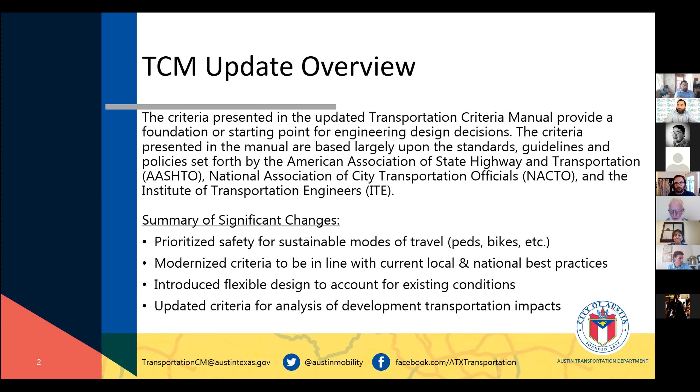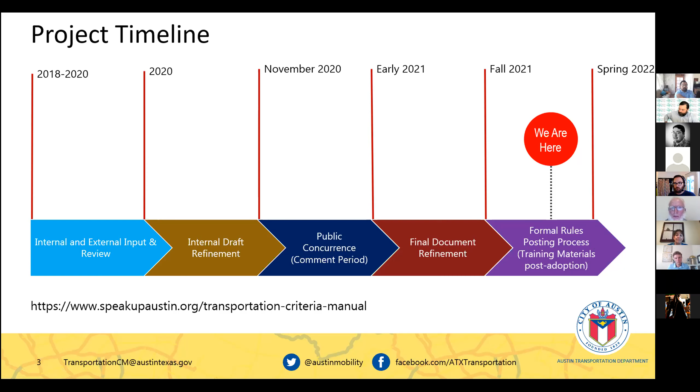So where we're at right now, like Jay said, we're open for our final round of public comments currently. We've been through a couple years of revisions, because this wasn't just a typical minor revision to a criteria manual. This was throw the whole thing out, start over again, work with all the departments on what will go in that document. So now we're in the final process of rules posting, which is public comment until the 1st of November, and then it will be going for adoption.

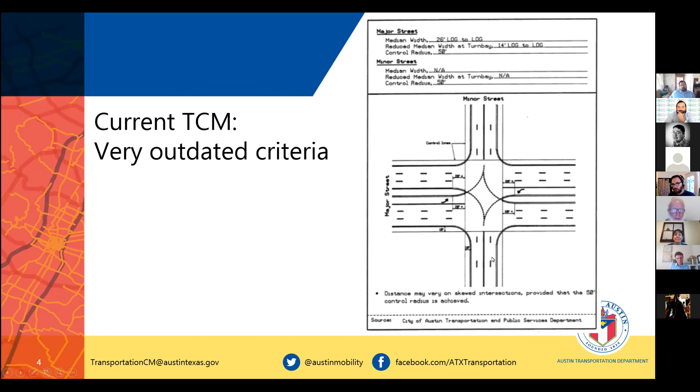The current criteria manual is very outdated. This is a figure that is still current in the manual, showing kind of what we don't want - just big multi-lane arterials. Typically we probably would not ever do a 4-lane undivided as a new street right now, yet this is what our manual still shows. It doesn't really get into much detail about pedestrian or bike crossings or facilities. So very outdated, to the point that we basically don't use it currently, because it's just so very out of date.

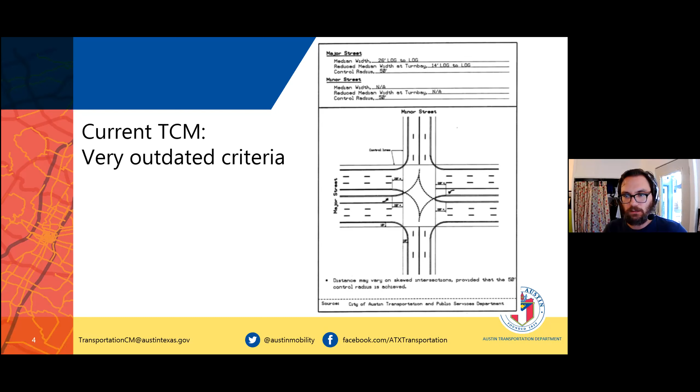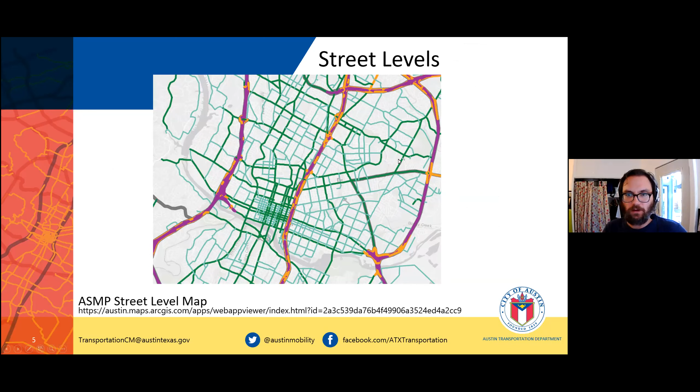Some background that might be helpful is that in our Austin Strategic Mobility Plan, we have what are known as street levels, where anything that's not really highlighted, just like a little neighborhood street, that's a level 1 street. Collectors are 2s. And then if you're familiar with Austin, things like Pleasant Valley Road or Airport would be a 3. And something bigger like a major arterial or highway is like 4 or 5. So that's just for context as I am showing some of these figures.

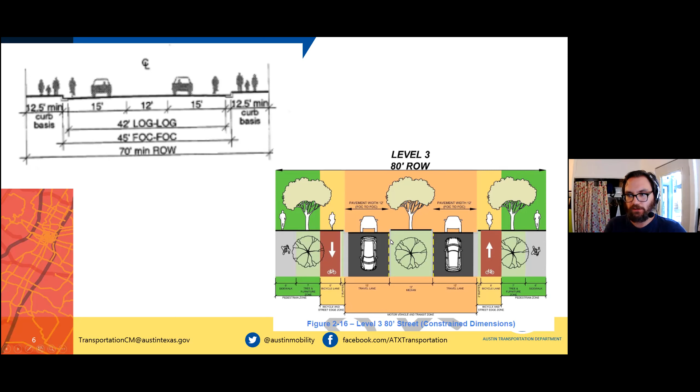Again, very outdated previous TCM, where these are kind of similar levels of street and similar amounts of right of way. Previously, just a wide outside lane without designated bike lanes of any kind is what is shown in the currently adopted figures. Now we're showing what we now know to be a much better, safer solution in our cross sections, with raised protected bike lanes, generally median divided for more major roadways - kind of just a better multimodal experience.

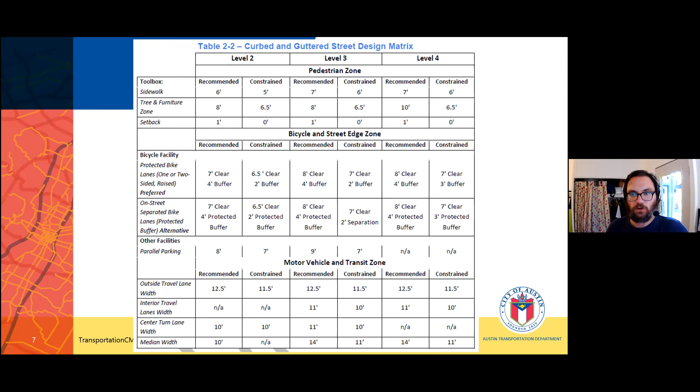This is a lot of information, but this is probably the table that a designer of a street in Austin would be going to the most, which is really setting the minimum and recommended dimensions of things like these raised bicycle lanes, the offset from the street, how wide the travel lanes need to be, the tree zones. This has all been updated and really modernized to prioritize multimodal safety.

Only in rare cases does the NACTO contextual guidance say that the right solution for the street is a shared street or bicycle boulevard, meaning cyclists, even young cyclists who might be heading to school, would just share the road. They have very strict guidelines on that - less than 20 miles an hour, maximum volume thresholds for vehicles. And that is kind of hard to overstate what a sea change that is in terms of thinking of designing our public streets.

For any of y'all from Austin who might know how our old speed management applications worked, really when we thought about speed management previously, or even up to today, we were thinking about the posted speed of a neighborhood street is going to be about 30, maybe it was designed for 35. So let's collect the speed data, and the 85th percentile shows people are going 35. So maybe let's put a few speed humps in to slow them to a bit closer to the speed limit. But what we know from using this guidance is that it's not slow enough - we need to be aiming lower to make these level 1 streets actually safe for the neighborhoods.

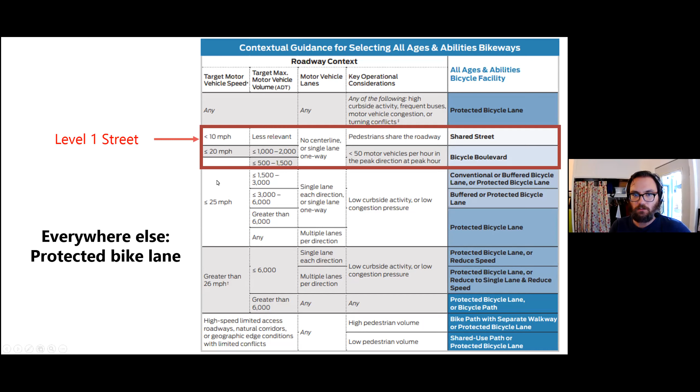Really what this contextual guidance says is that everything else, anything of a higher volume or speed threshold, the right answer for that street is a protected bike lane. So that's kind of where that was our starting point for the TCM.

The criteria now also looks at target speeds versus a more typical design speed, rather than going a bit above the speed limit. This is more like designing for where you want the speeds to be. So for these level 1 streets, a lot of that is going to be in the 20 mile an hour desired threshold.

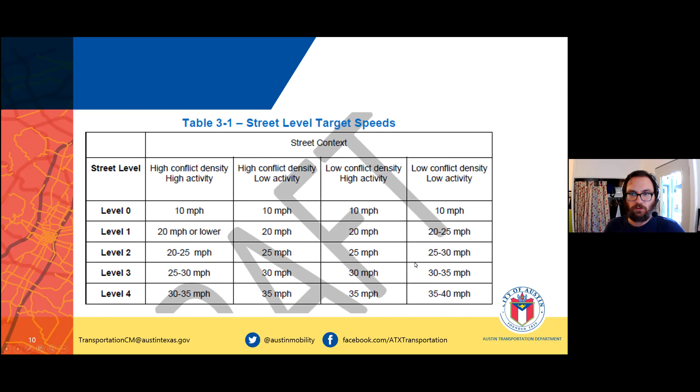Even at something like an airport boulevard, the thought would be that it would be designed to be a bit slower than currently. That leads to the natural question of how do you design to get those desired speeds? This is a typical cross section for a level 1 street in our TCM update - a rather narrow street with parking both sides to create that friction.

And now written into the criteria is that for new streets, there is a maximum spacing between a speed management treatment. That could still be speed humps, but typically that might also be things like pinch points or bulb outs or crossing islands that do more horizontal deflection to slow speeds.

The idea here really is that rather than the previous way we did things, where a developer might build a whole network of streets for a development and they wouldn't put any speed management into it - just long straight streets - and we know that will lead to speeding. We have the data that when those streets get built, there is a speeding problem right out of the gate.

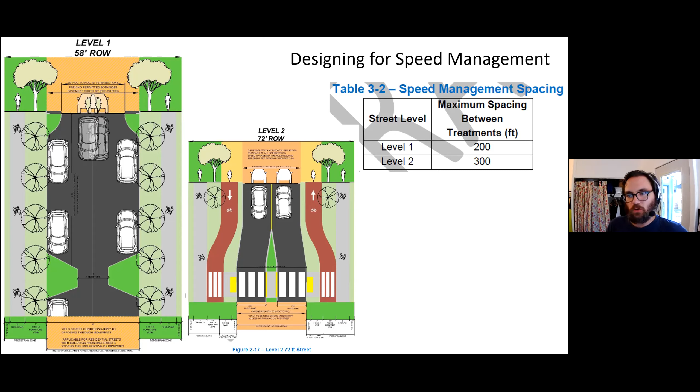So rather than putting those new streets into our future work that we're going to need to handle with speed management down the road, this makes it much more proactive, and we're building in that speed management right from the start.

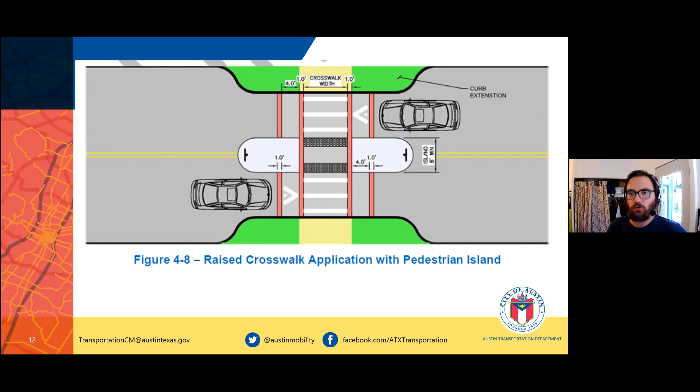So all of these things like bulb outs, crossing islands, raised crossings, we have been using them kind of as one-off designs for these speed management projects, but now it's really built into our criteria manual as a tool that we can use by default without lengthy approval and review from other departments.

Same with our neighborhood bikeway treatments that we might be using for specific bike routes that we're retrofitting through town. We now have some tools such as restricting vehicle crossings to have lower volume neighborhood bikeways. That is now a tool in the toolbox that we did not previously have.

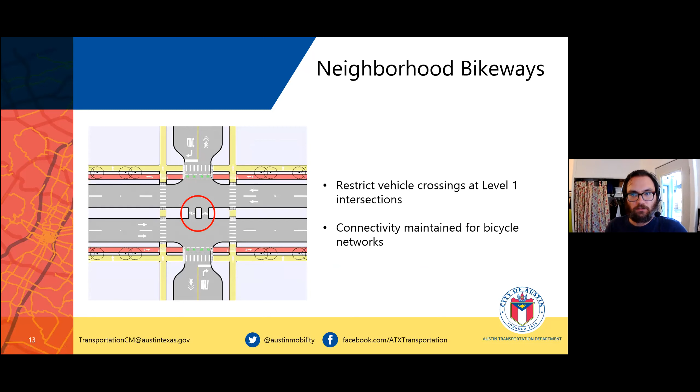Specifically to bulb outs, I know this is an important thing for some. The TCM is now very specific about it - it just says very straight, bulb outs are to be used as a preferred treatment rather than the inclusion of a turn lane at intersections. Of course, there's always going to be more major intersections where maybe they're signalized, or for whatever reason, we know through analysis that a turn lane is needed there.

But this kind of goes a long way to say that, by default, the solution is that if there's parking on the street, you'll bulb out at the intersection where that parking was. So things like reducing crossing distance with either median refuge areas or these bulb out solutions is now much more baked into our criteria.

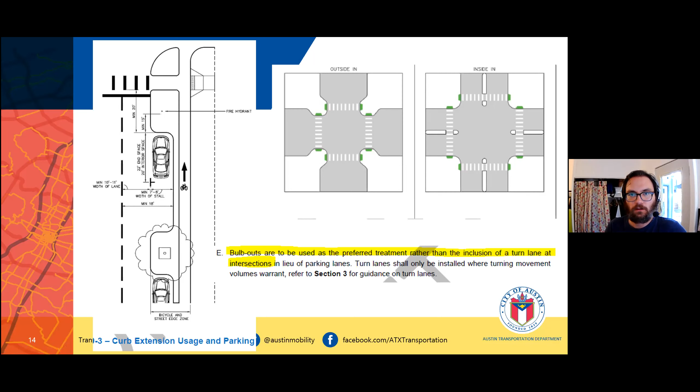And here's just an example. This is an intersection in the Mueller development here in Austin. It was essentially designed to the same criteria that we're talking about in the TCM update, but required rigorous going to different departments, getting design exceptions, going to the fire department, all kinds of groups, public works, to get permission to do this kind of more urban design to reduce crossing distances and reduce turning speed of vehicles.

Now this is what the standard for two neighborhood intersections and two neighborhood streets intersecting would be. It says specifically that it is a narrow width between the bulb outs and gives a much lower radius as standard for these intersections.

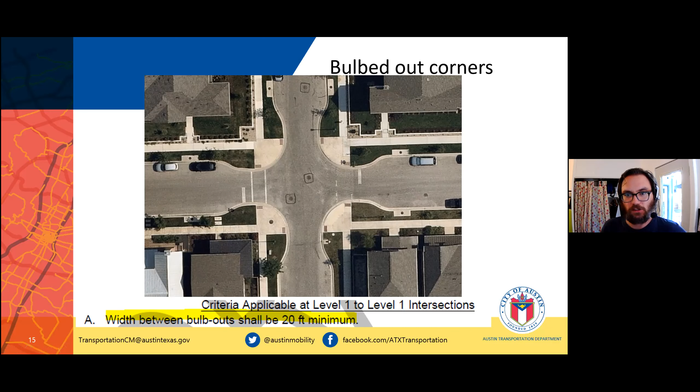And that was all describing what our approach was on level 1 neighborhood streets. So this is kind of everything else falls into - we need the dedicated space for protected bike lanes in this bicycle street edge zone, as it's called in the TCM.

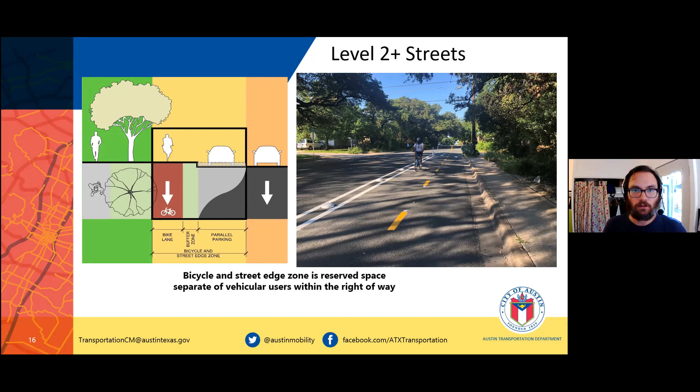And I'm sure most, if not all of you on the call are familiar with these approaches, but it's protected bikeway. Here it's shown as kind of an at-street, but in general, the TCM is proposing raised bikeways as the main solution for new or retrofit streets, separating cyclists from the street zone.

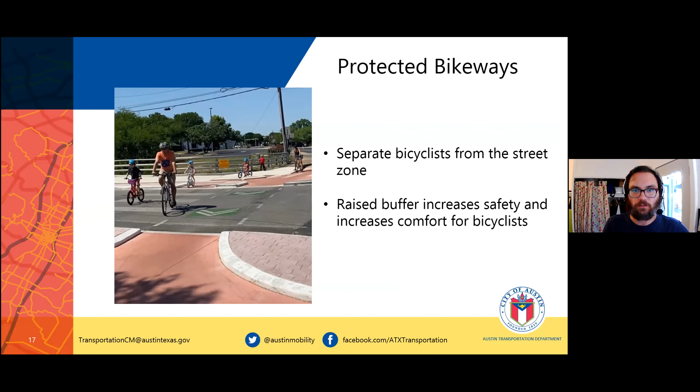And now there is also, for the first time, adopted guidance and figures for protected intersections, which is huge. This is really the preferred treatment for anywhere that we have separated bike lanes. As you approach an intersection, it gives the designer all the details they need to design it.

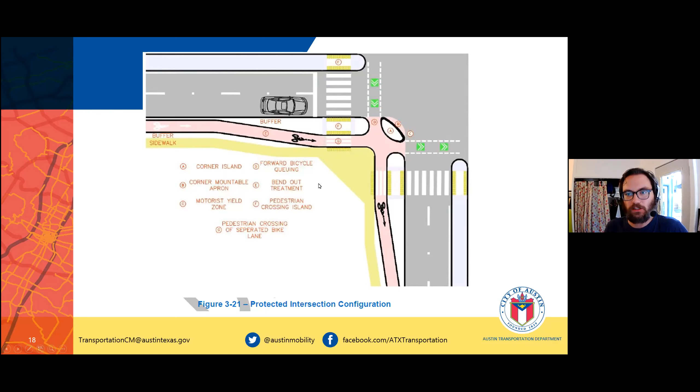Although we do have some upcoming standard details that would be an appendix to the TCM to give even actual dimensions and a lot more detail about constructability.

Not to say that protected intersections are something we haven't been doing. This, again, is in Mueller, what I understand, one of the earlier protected intersections in the country. But again, it took a lot of detailed conversations with different departments to make it happen.

Whereas now it's worded very deliberately: when non-vehicular modes of travel are separated prior to the intersection, protected intersections shall be the standard intersection design. So it doesn't leave a lot of wiggle room. Unless there's a reason we could give a waiver for, that would be the standard design for an intersection anywhere streets with bike lanes meet.

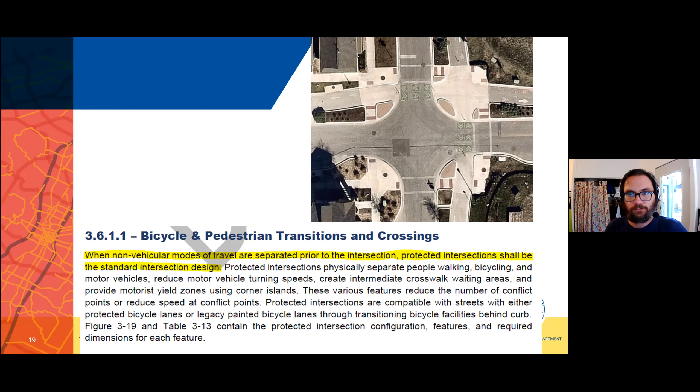Another big change for the TCM is that anywhere where, if you see cut off here, what would be the left to right street would be the major street in this example, and the up and down street would be the minor street, level 1. In those cases, the raised bikeway and the raised sidewalk would remain raised across the intersection.

This is something we've seen examples of in other cities, notably in Cambridge. They were one of, if not the leader of raised bike lanes in the country. We heard from their experience that they did not require these raised crossings when they first started installing raised bikeways, and it was fairly problematic in terms of feeling like you're riding and going up and down a roller coaster as you hit these minor streets and driveways, as well as right hook problems from vehicles turning in across the bike path quickly. Whereas this would slow anyone and act as a gateway that you're entering these lower speed streets.

We had a presentation on this last week, and there was a lot of questions about the treatment here. So as well as kind of visually indicating this is all a big concrete apron, you would continue the colored bike lane across the intersection, so visually you can see that there is potential conflict here and to be aware.

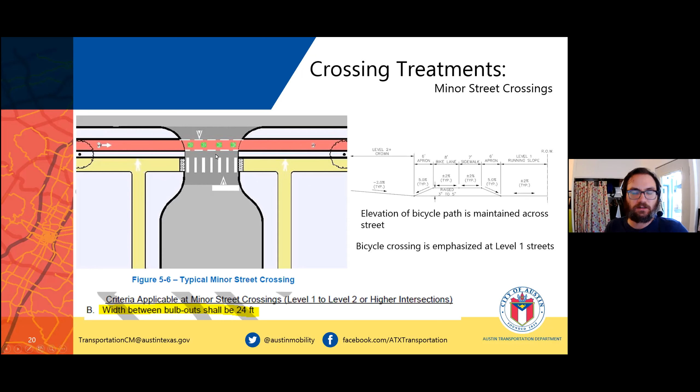Similar to this, we have been building integral color into our bikeways in recent years, as well as standardizing the conflict markings of bikeways for a good number of years. But it has not been an adopted criteria manual up until now. So this will make that all very consistently done, whether it's an internal project to our department or a developer building or a big corridor project. So whoever's building this will make it much more consistent.

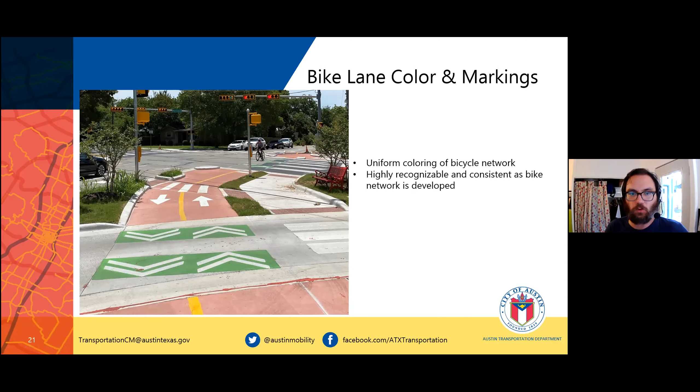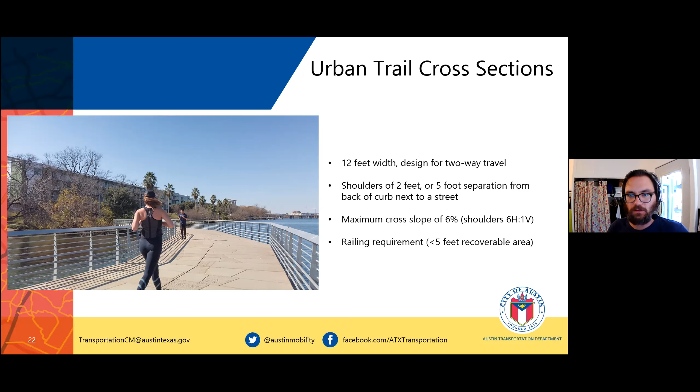Regarding urban trails, this is also kind of bringing their criteria up to the state of practice that they're already following, but just getting it all written into the manual in terms of what is their desired width versus a minimum 12-foot width of an urban trail. Things like slope grades, railing requirements, all of that stuff to properly design an urban trail, as well as design speeds that have never been really fully adopted until now.

Now that is in the urban trail section, as well as the bikeway section, to make sure that we're not creating quick bends in bikeways, things that are just not comfortable or safe to navigate, as well as things like vertical clearance criteria.

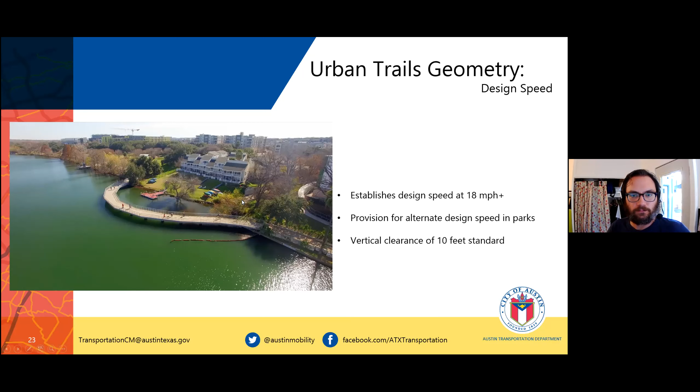So what has made these tighter, more human scale designs possible? We have been doing some of this stuff for a few years, but it has been a pretty cumbersome process to get each unique design through all of the review process, because it's really not in an adopted criteria manual.

And if you want us to go out with you in a fire truck to prove it even further and set up cones, we'll do that. And they took us up on that. So we went out for an afternoon of riding around in fire trucks, really proving to all of the various stakeholders that this would work.

So that really took rethinking of all different assumptions about roadway widths, about lane widths. These radii were a big deal to various stakeholders about intersection radii. For example, if you were to look in our old criteria manual or in TxDOT's roadway design manual, you're going to see radii that are 50 plus feet often for certain levels of street. And we're showing, from the lower level streets, maybe 15 up to 25, 30 at the very highest. So it is pretty radically different, which took a lot of talking people through and showing them that this could work.

Up to the point where we did need to amend fire code in the city to make this all mesh well together, so there was not a conflict between what is in our adopted criteria manual and the fire code, which resulted in this more human scale design.

And it really took rethinking our assumptions even more broadly about what is the best, highest use of the street, and what does it really take to make a neighborhood street comfortable for even a kid who might be biking in the middle of the street. And maybe that takes more deliberate steps than what we've been doing in the past.

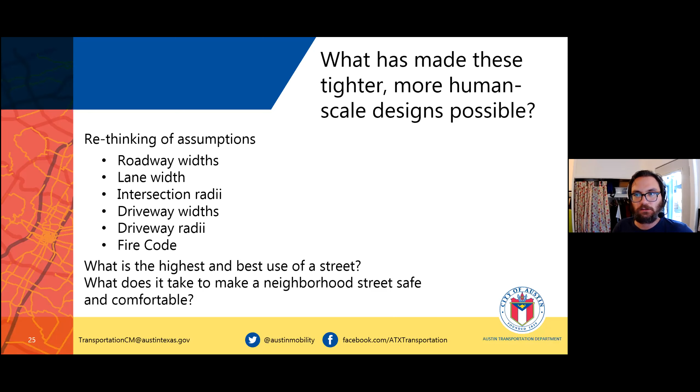So that was kind of the broad overview, but happy to take any questions. And before I do that, maybe I can put this in the chat, the link for the Speak Up Austin website. I think there's still about a week and a half to two weeks left to comment on the latest version.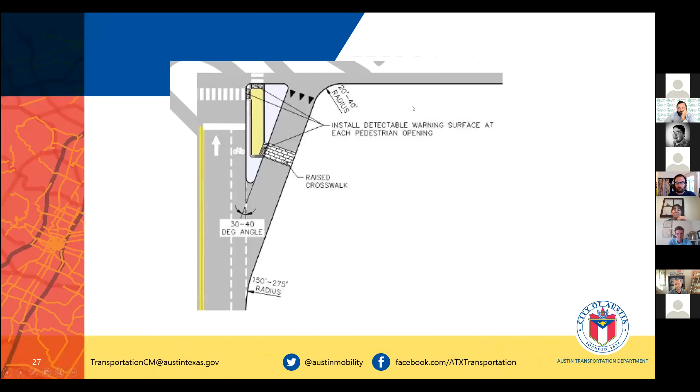Hey, Mike. You mentioned straight streets, and I'm glad you mentioned it, because I've long been a fan of slightly bent streets, or not having extremely long sections of straight streets. Not only because it encourages speeding, but for walking it's just inherently dull. And while I think the more old world organic street layout, where the street layout is completely all over the map, like the ones I grew up in, are bad for navigation, it seems like some of the really nicest streets in Austin, like Shoal Creek Boulevard, Alameda Drive, and in Travis Heights, East Side Drive I think, have a loose grid, but they're also a little bit curvy. So there's something that unfolds as people progress. Does the TCM speak to that? Does it have things to say about really long straight streets and maybe not always doing that all the time?

That's a good question. Not to my knowledge, aside from the more typical way of thinking about it, which is what should your maximum or minimum curves be from an engineering perspective. I guess a couple of things that would have changed in that regard would be, one is having the target speed rather than a typical design speed. So rather than shooting for above what your posted speed is going to be, we would be aiming a little bit lower now. So again, that is still thinking of it a little bit backwards from what you're thinking.

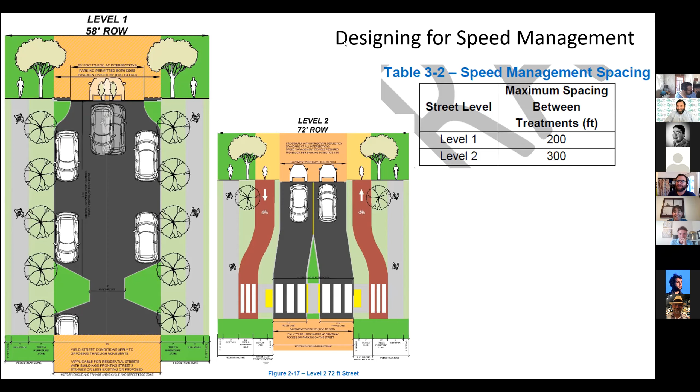Yes, I actually had, I think, as one of the later slides—I thought I was getting a little too lengthy on time—but there are now various size roundabouts and traffic circles included as figures in the TCM. So they are essentially adopted and cleared through the interdepartmental review, which should make it simpler to use one of these.

Was there a more specific question, or just whether they were addressed? Well, I don't know if Gary wants to weigh in, but it's great seeing the different levels of design. I'm curious, when is a traffic circle used versus a roundabout? Is the difference really the diverter things on the edges of the circle, or what's the distinction there?

The way the distinction is worded in the TCM is similar to how I walked through differentiating a level 1 versus everything else. A traffic circle would be more like a level 1 treatment, where you expect it to be much smaller in size and reduce speeds more—kind of a shared space situation—versus a roundabout, which I wouldn't say is high design speed, because we're still showing raised crossings and deflection to slow people as they enter, but certainly a bit higher speed than a smaller traffic circle.

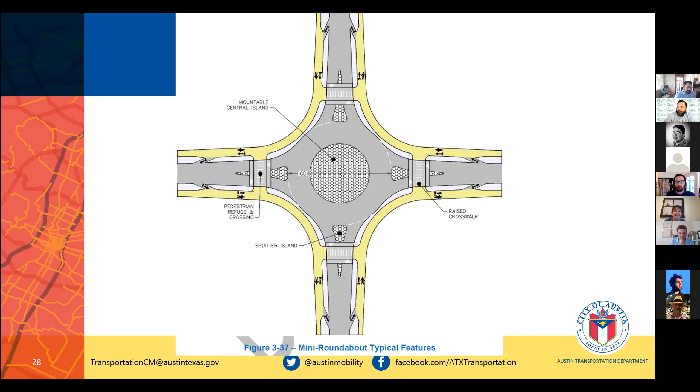Then another whole part of the transportation criteria manual—I asked Dan to try to explain to us some about how this is going to impact development in Austin. So with that, I'll hand it to Dan Hennessy, also in the Austin Transportation Department.

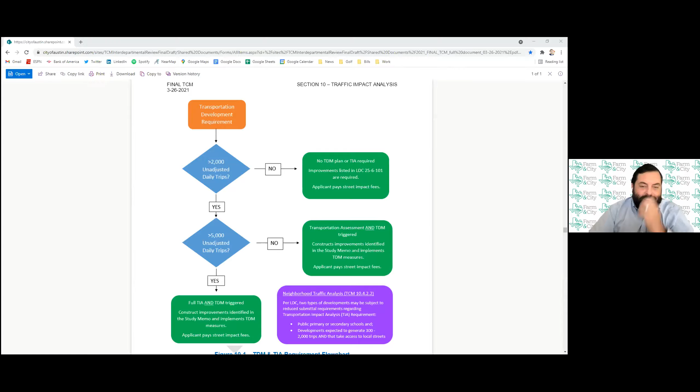All right, thanks so much, Dan. To some extent, that chart you have is kind of the whole story. I think this part is very exciting, sort of streamlining this process, and there's a lot there. I guess I wonder, my question — and see if anybody else has any questions, please raise your hand.

What is it for somebody who's skeptical of development? Are the changes going to mean that basically the benefits are going to be better? Basically, that when a building comes into your neighborhood, you're going to have better sidewalks. Basically, what do you think about that?

Yeah, the specifics — I would hesitate to commit to the specifics, but what I would say is that the transportation department can now guarantee that a development applicant will contribute to transportation improvements. Whereas before we had to go through a very time-consuming process of negotiation: identifying the improvements, are they feasible, are they within the control of the developer, how much can we actually charge them based on our guidelines, do we have enough funding to complement that fee so we can actually get it built. That all goes away. We've now identified the improvements through the street impact fee program.

There will be some related to the specific site plans themselves, but that's all within the administrative code. So now everybody knows on day one where we're starting, and we can whittle down from there if there are specific improvements needed for construction. Otherwise, that money will come at the time the developer gets a building permit — they'll have to pay that fee. Then the transportation department, through community input and council member engagement, will determine how to use those funds on the included projects.

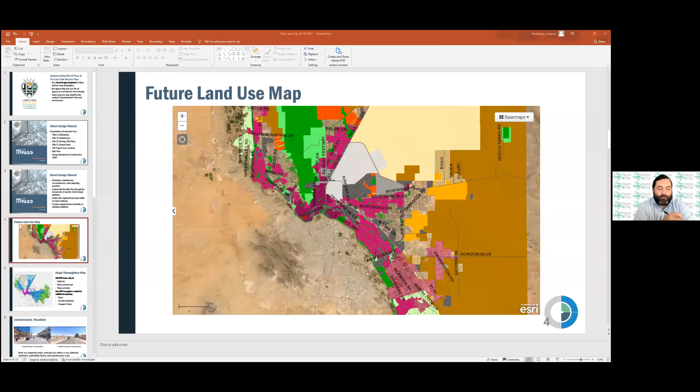Thanks, Joaquin. Cool, thanks. Thanks everyone for having me. It's great to be from El Paso and get included in some of this stuff.

Our big goal — El Paso is kind of in the middle of a planning renaissance. We adopted our comprehensive plan about a decade ago and have had a lot of false starts and struggles implementing a lot of that stuff. So recently, in the past couple of years, we've revived the long-range planning functions, and through that, namely the development of the East Side Master Plan, we started to kickstart some of these initiatives. In that development, we identified a need for some updated street design standards.

Essentially what we're trying to do is tie street design standards to our future land use map designation. Namely, we're recognizing that our previous approach of the sort of one-size-fits-all cross sections in our design standards document wasn't really working.

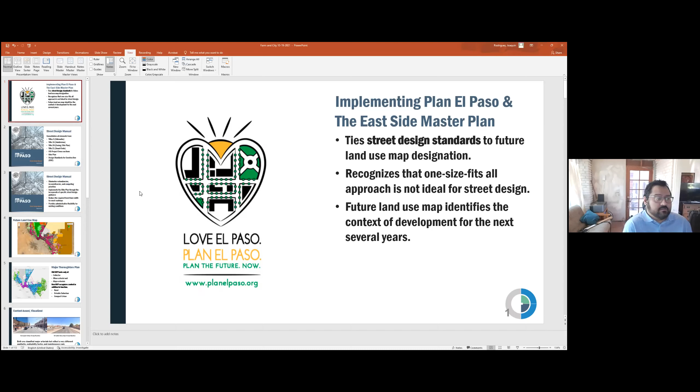Additionally, we have street design requirements across four or five titles of our municipal code. We have internal project cross sections for our public works projects, a different set of standards in the bike plan, and then the design standards for construction. So it's kind of a mess of different areas where a project manager or a designer would have to go to figure out what the street for this area needs to look like.

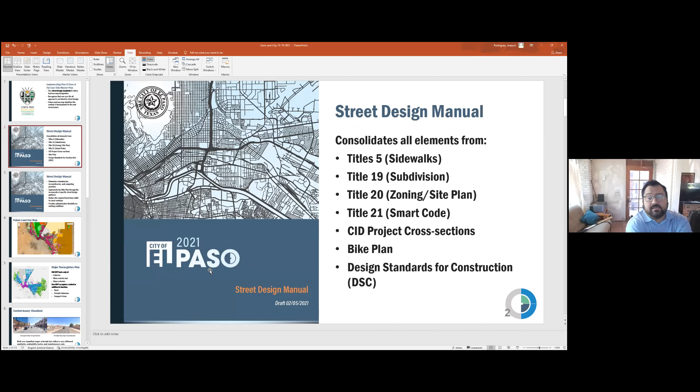So again, our goal was to eliminate a lot of those redundancies and inconsistencies. One of the main goals was to implement our bike plan in a more meaningful way. We are focusing on reducing required travel lane widths, and additionally we're trying to provide more administrative flexibility for existing conditions.

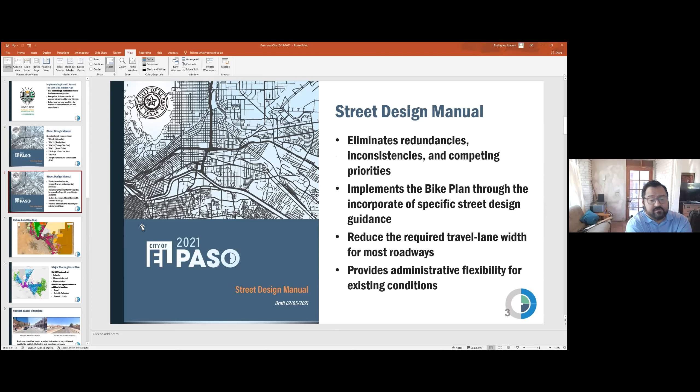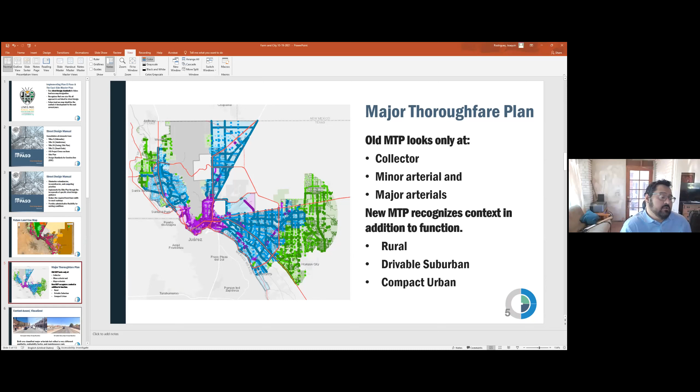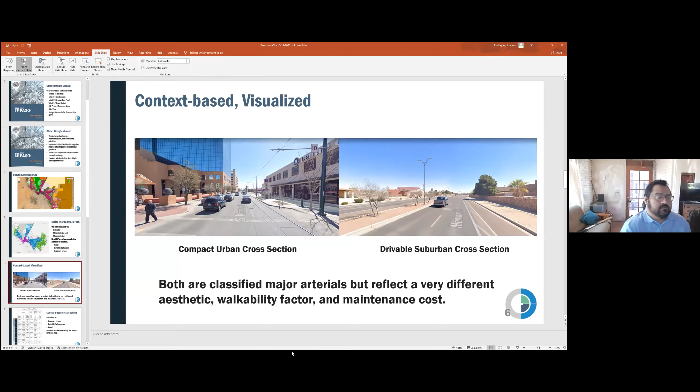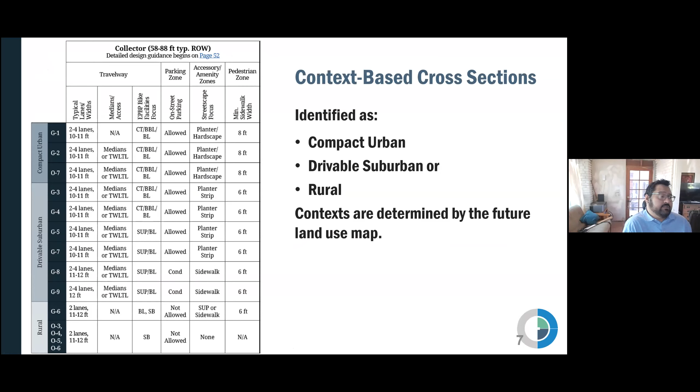So again, we've sort of taken this kit of parts approach to context-based cross-section design. It's probably hard to see on your screens, but if you look over at the left, we have the context zones and their associated future land use map designations, and then some guidance to develop a base cross section that is reflective of those factors.

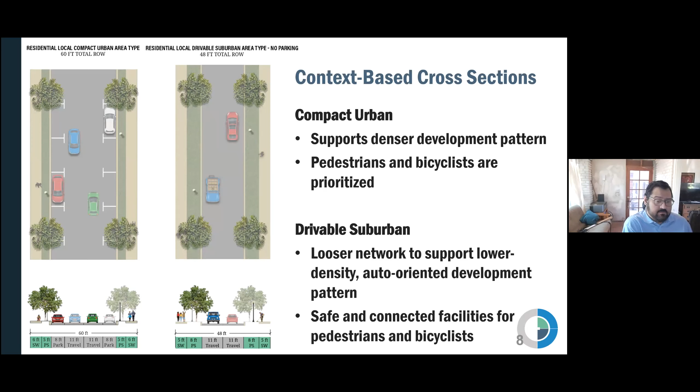We can then work to minimize that cross section width and enhance other facilities along that thoroughfare.

Again, Jay mentioned this earlier, but in I believe it was 2010 or 2012, we adopted the city's bike plan. It was adopted by resolution, and there was never really any meaningful effort to codify those requirements. So if you were to look at our subdivision development code right now, essentially there's one paragraph relevant to bicycle facilities.

That would require a 10-foot hike and bike on either one side of the road or both sides of the road. There's no guidance for any expanded bicycle facilities, no on-road facilities. It was just a one-size-fits-all approach.

So what we've done is implemented our bike plan and really just adopted the NACTO standards. The city of El Paso adopted NACTO about a decade ago as well, but we did so only for city projects, public works projects. What this effort does is extend those design standards to private development as well.

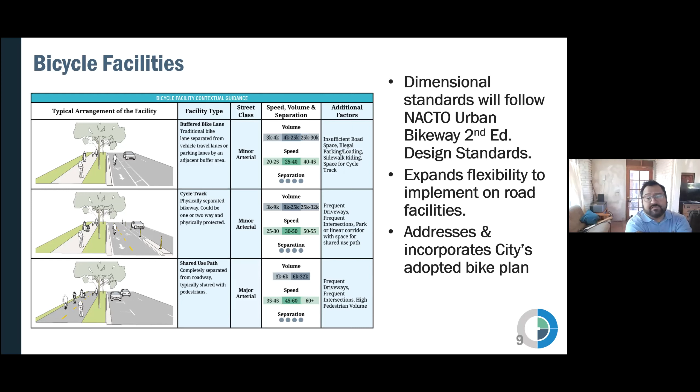And the reason we went with this kit of parts approach, I'm sure you all are familiar that a lot of times when a new development or a proposed development goes in front of the City Plan Commission, it's sort of, here's the standard, can they do the standard? If they say they can't, they can ask for a waiver. So it's really all or nothing.

So the hope is with this kit of parts approach, we can start to have more of a negotiation, in that we can have more of a back and forth.

I'm sorry, I don't know if you all have seen it, but my Teams is blowing up right now on the screen.

But hopefully we can have more of a back and forth and start to implement some facilities rather than just a wholesale exception to those improvements.

And kind of to what the previous speaker said, this is sort of our first step. We are also looking at a fee in lieu of improvements policy that we hope to implement in the near future.

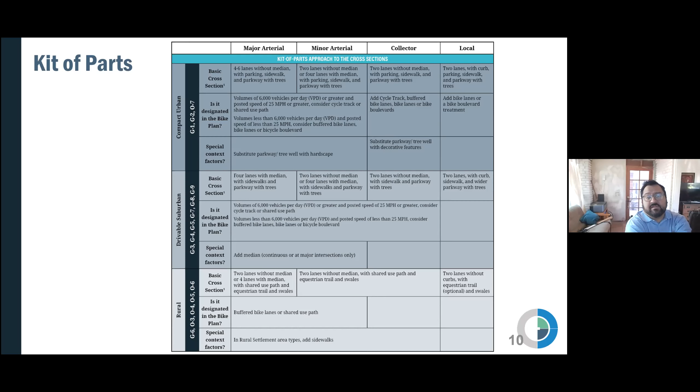And that's pretty much it. The rest of the slides aren't super important. Again, our street design manual is also up for public comment right now. I can drop this link in the chat. It's actually a much earlier draft before we decided to add in the bicycle facilities piece. But you get an idea of the direction that we're trying to head in.

Okay, great. Thank you very much. It's exciting to see what y'all are doing there.

One interesting part I'll throw in as part of the city of El Paso city plan was that context-sensitive approach to everything. I don't know if people know about that, but there was sort of an urban zone built into the whole approach to land use and transportation for the city of El Paso. It's neat to see all that coming together in the street design guide.

Yeah, it's been a big missing piece for us. The problem with the one size fits all approach is that you end up with the same streets everywhere, so all of our new developments look identical to other new developments at this point. There's no sensitivity to context, no sensitivity to surrounding development. Hopefully we can start to get streets that make sense for their surrounding development and spur some new development that takes advantage of that.

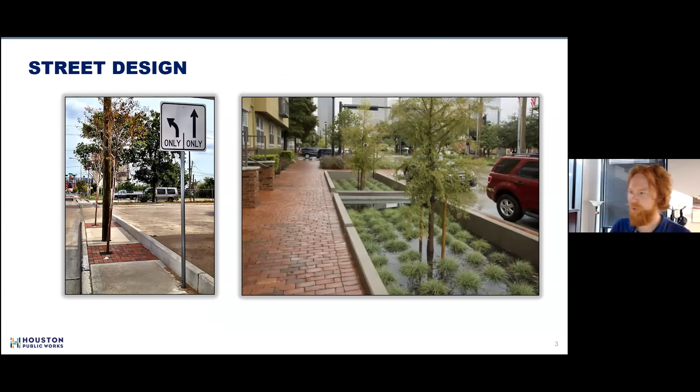Brand new sidewalks, good sidewalks, bad sidewalks. One of the main things we really changed recently that I wanted to emphasize is lane widths. Just a couple years ago, we were 12-foot lanes everywhere, and around town that's still a lot of what you see, streets designed like highways. But now we are looking much more at 10-foot lanes.

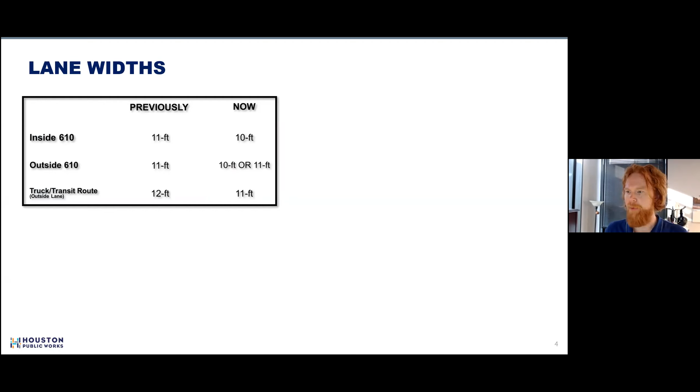The way we handle this is a little interesting. We have our Loop 610, our freeway network. In Houston, we define everything in reference to our freeways. For various reasons, within 610 our standard lane width is now 10 feet. Outside 610, it's a little more variable, having to do with the kind of development we see. This is evolving, and the fact that we're even talking about 10-foot lanes now is a big step for Houston.

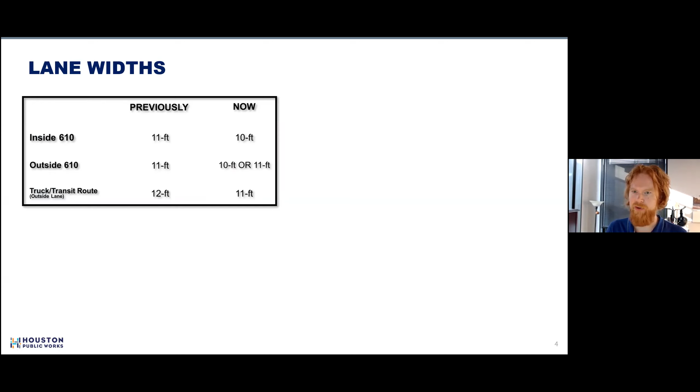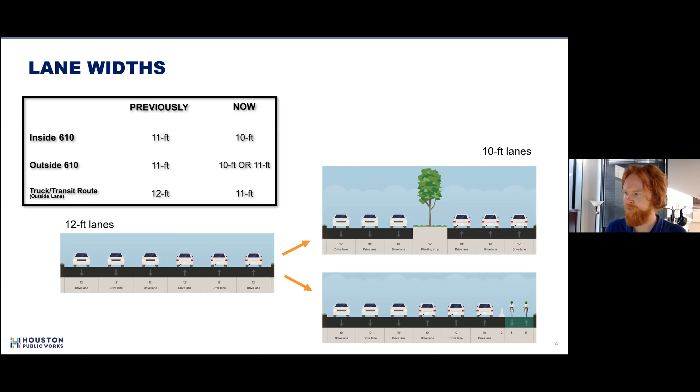What that gets us is every foot you can get gives you space for extra trees, landscaping, bike facilities. I don't need to convince anybody here about what we can get from narrower lanes, but it takes some work to convince people from outside this sphere about why these changes make sense. Recently we've been talking a lot with our transit agency, and the push and pull of a lot of these safety measures goes hand in hand with working with other agencies. Transit agencies typically push for wider lanes, and we'll try to push back a little bit.

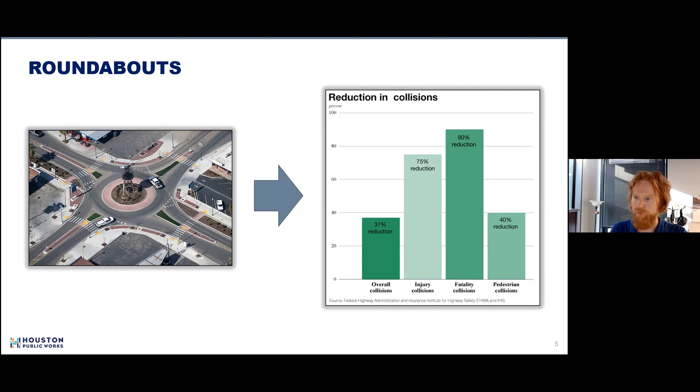I was thinking about not including this because I don't really have much to say, but I wanted to emphasize, and I think I made the right decision now with Gary here, that we've had roundabouts in the IDM for a while, and they've been encouraged in Houston but not very loudly. A lot of people didn't know that Public Works supports roundabouts. So we've fleshed out that section in a lot more detail, really just to encourage people to look for opportunities where they can fit these, or if you can do them smaller, hey, we're open to mini roundabouts as well.

A big change we just made within chapter 10 involves some very in-the-weeds measurements and design elements, but these really make the street. For a lot of people these aren't particularly interesting, but they make a difference. We have this idea of a design vehicle and a control vehicle. For the longest time, the typical way of thinking about it is a design vehicle for a roadway, meaning you want the road to accommodate the vehicles using it, so large trucks can make turns without clipping corners and damaging curb.

That could even be a safety thing, you don't want a big truck running over the sidewalk and hitting somebody. So some of this isn't just evil traffic engineers, there was a lack of nuance previously. We've now introduced the idea that not every vehicle has to stay in its designated lane the whole time, that's okay. On some streets, for certain movements, you can have large trucks swing wide. That's really what they're doing anyway, and it's not a problem. So we've codified that now to encourage people to think more about not designing every element specifically for a truck to make the turn.

If you can think more holistically about how the roadways and intersections work, you can use them as a control vehicle.

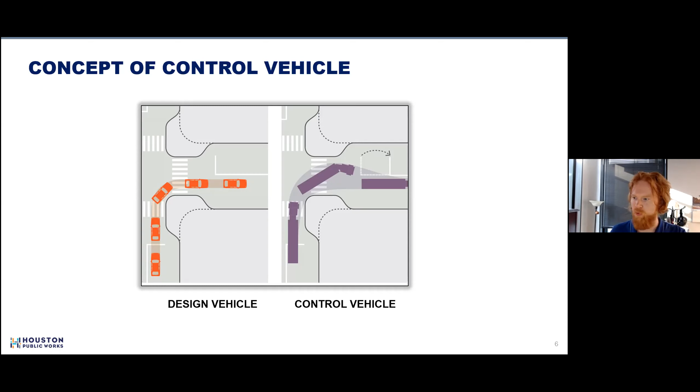Along that line, we've opened up what the different kind of design vehicles and control vehicles are. All of these really plug into how wide our lanes are acceptable, what are the curb radii at intersections, how are median openings designed. They impact a lot of the street features. So getting these design and control vehicles right is an important thing to do.

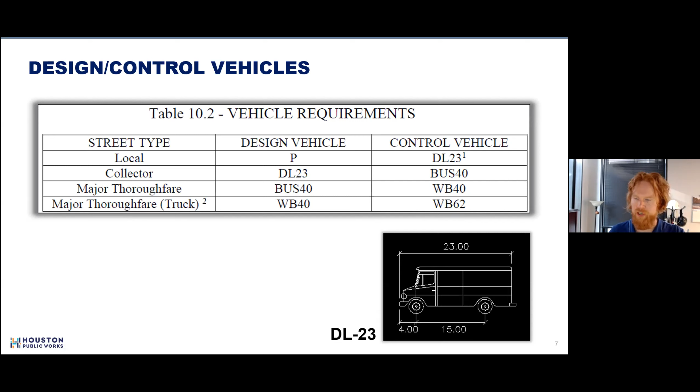We've introduced this idea of widening it out. Now we're looking at the DL23 design vehicle, which is kind of a smaller box truck - it's a NACTO truck standard. We've moved away from some of the really, really big trucks because we don't really see those on city streets. All these are different templates of vehicles if you don't look at these numbers all the time. We'll have buses, we'll have the WB, our big semi trucks, and only rarely now are we looking at the biggest trucks because we really just don't see them on city streets. But previously, in previous iterations, we designed every street, or many of the streets and intersections, for the absolute biggest vehicles that we could find.

Still focusing on the curb radii, because this was a pretty big win for us. This is going to take some time for all of these to propagate throughout Houston, so you actually feel these benefits. But it's the kind of thing that'll impact the streets in subtle ways in terms of speeds that people are turning, crossing distances for pedestrians.

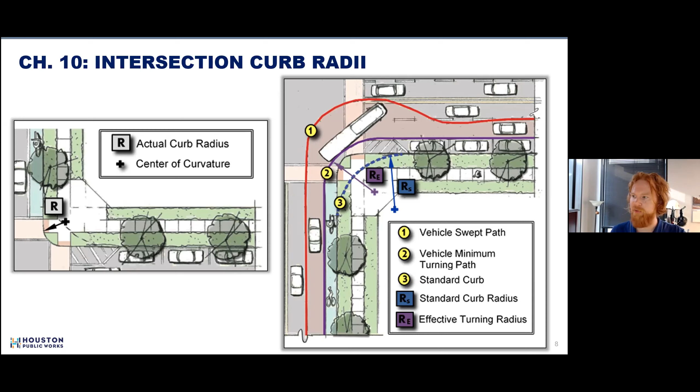And so now we've also codified the idea of effective radii at intersections, where you might have other roadway features that allow vehicles to make wider turns. You don't have to make the corners such that you have to accommodate them - they can swing wider. If there's an unused bike lane, or if there's parking, or we don't have a bulb out, you might be able to use all of those elements to effectively accommodate the truck without actually narrowing the curb around the corner.

And why that matters - I think everybody here knows - but these are kind of figures that we talk through to everybody to explain to them why our roadways might be looking different. So wherever we can shorten the distance that people have to cross, you'll do that. You can see where they would have previously had to cross with old design standards and wide radii at corners. Now people who are walking have to cross a much shorter distance.

That helps also build out the ramps at corners. A lot of the times we'll have non-directional curb ramps for people, for all roadway users, just because the radii are so wide. Now with shorter radii, with smaller radii, you can actually do nicer, more directional curb ramps.

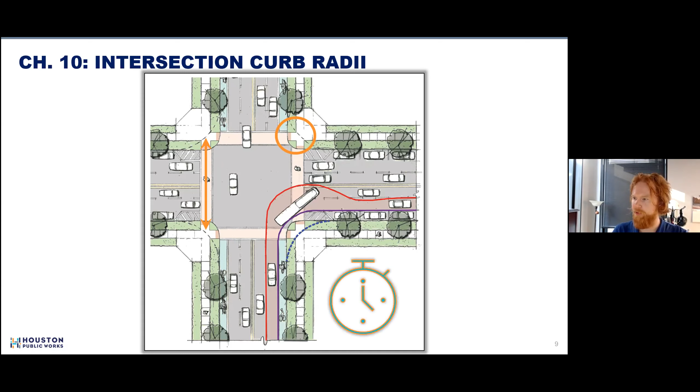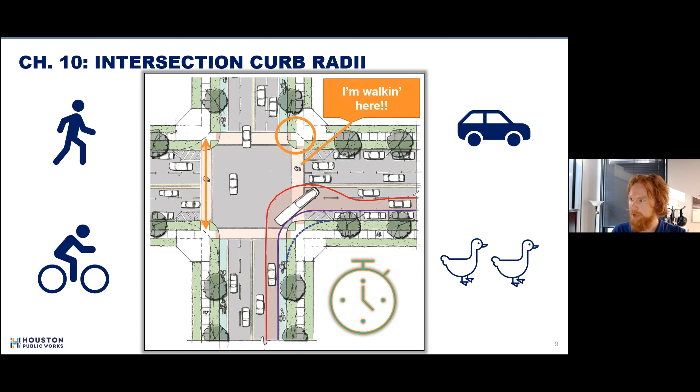All this impacts signal timing too, so there's some benefit to all the driving public too, because the less amount of time that you have to time the signal for a pedestrian crossing the street, you can actually give that time back to moving the vehicles. So there's actually a capacity benefit to doing some of these things. And then it can also decrease the speeds that people are turning and make the pedestrians more visible. And so that gets you everybody moving across the intersection as safely as possible.

I just got a couple more things I want to touch on here. I'm also joined by David Fields, who will also talk about a lot of our pedestrian elements and some of the ordinances that have passed recently. But we have tied a lot of our city ordinance that deals with sidewalks into our infrastructure design manual, and we've tried to really clarify and link those up.

So you'll see ideas now where we are actually by ordinance requiring that we define sidewalks and the different buffers on the side of the sidewalks differently. We're not just saying, hey, you're going to build a sidewalk next to the curb. Now we're saying you actually have to provide what we're calling the safety buffer between the sidewalk and the cars, to provide that extra level of safety. And on the other side, we elected to call it the frontage buffer - basically the front of the properties on the back side of the sidewalk. So all these are defined and required by the IDM now.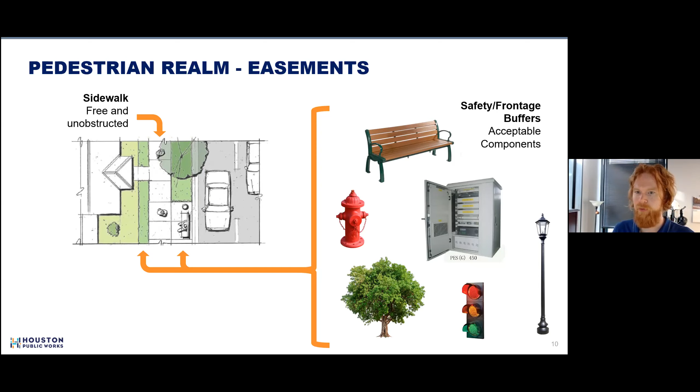And what that should result in is that now we have a place to actually put all the stuff that always gets stuck in the middle of the sidewalk because we haven't previously provided that much space. A lot of this stuff is necessary - street lights and utilities are necessary. Different kinds of benches and street trees are of course desirable, but if you don't have places to put them, you're not going to have them, or you'll have them right in the middle of the sidewalk.

Our sidewalk standards have really exploded as well. We've tried to make that much more context sensitive. The planning department has worked very diligently to define different corridors where sidewalk widths are defined, so the IDM now will come through and have minimum widths that are much wider than they previously were. We're still keeping it relatively simple, not with all the different kinds of cross sections we've seen in some other cities, but at the very least we've pushed those standards up from just a couple of years ago.

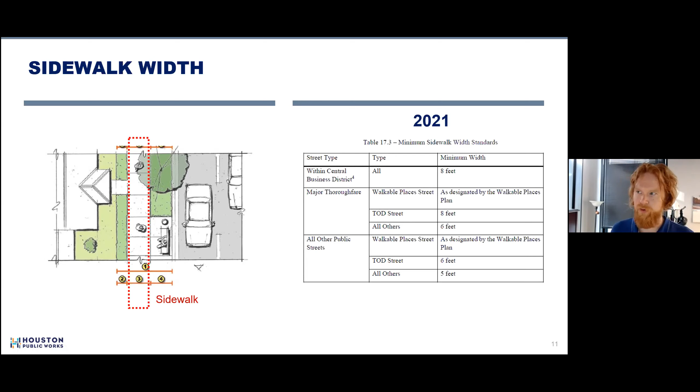Our sidewalks were 4 feet wide. We finally got them to 5 feet wide a couple years ago, and now 5 feet is the smallest sidewalk you should ever see, just on the smallest streets. Almost every other street will either be a major thoroughfare with 6 feet, or a TOD street, which is a designation for transit-oriented development along high-frequency bus lines or transit or light rail. Then we also have separate walkable places streets, which is a separate plan with its own different rules and regulations for how development can interact with the street.

And then for the safety and frontage buffer, we have a minimum and an optimal too. We wrestle with this, because if you just put the minimum, we found frequently that's what you get. So we want to always be pushing designers to think: minimum is by definition the floor, you can always go more on some of these things. That's different from standards like lane widths, where we don't want you to go more. So some of our standards are minimums you can go higher on, and some are more like maximums, where you might want to look at lower.

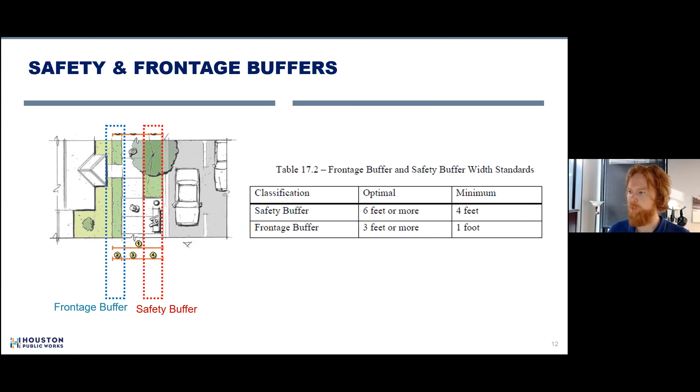One of the things we've introduced is actually covered by the ordinance. I'll show you the problem, and maybe this will make more sense. This is all over, particularly downtown - frequently you have a situation where there's an opaque surface along the sidewalk, someone walking right alongside it, and then a conflict with a car coming out of a driveway. This is just one example downtown, but there are many of them.

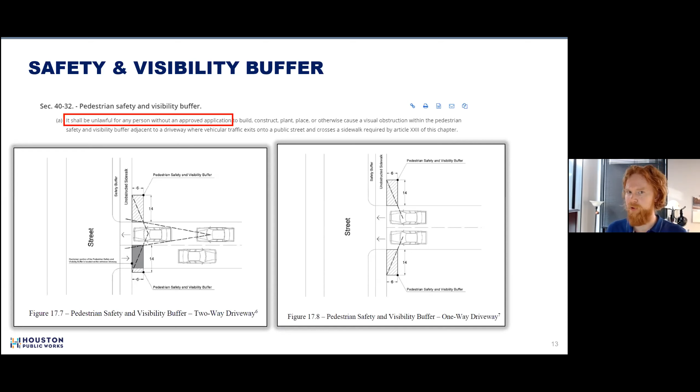So what we're requiring now, which can actually push back onto private land as well, is to open up around the driveway so there's not that flat wall, so that as drivers are coming out of driveways, pedestrians don't cross by without being seen. There should be a lot more visibility. And since this is in our code of ordinances, we can actually enforce these development standards as they come in on private property as well.

Just - I think this is my last slide. One of the things I've been struggling with is that our design standards in Houston are evolving and getting better, but they're already pretty good. There are a lot of streets you see designed that don't look like we want them to look, not because the design standards aren't there, but for a lot of other reasons. One challenge I've been struggling with within Houston Public Works is that there are a lot of different levels at which these design standards have to be followed, respected, and known.

In Houston, and I think this is probably true of all our Texas cities, you've got a lot of different people working in the street who aren't necessarily city or government, but who have some stake in how the streets work. Sometimes it's city projects, a major capital improvement project that tears up the street, or a more minor intersection project. But we also work with transit agencies that have certain rights to work in the street, we have the county doing work in the street, and other governments like TIRZs, which use tax increments to fund improvements within districts.

And then of course we have private developers, who are one of our leading impactors on the streets in Houston. We also frequently have simple property owners who have to get permits, for driveways for example, and they have to go through this whole process and ultimately follow these design standards. What comes next is that most of these people will work with consultants - they'll say, we want this kind of thing to happen on a street, and then the consultants will do the design.

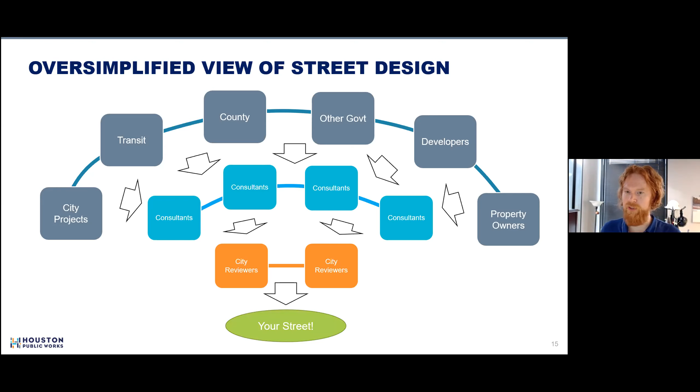You have to be able to hold strong because you have this push coming in from the clients, pushing on consultants, pushing on city reviewers, to get their project how they want it. At all levels you need to know what the standards are, because at the end of the day you're going to get a street. If you have your design standards in place, that's one thing, but they're only useful if they're understood and respected at every level. There's more to this too—there's the contractors who do the work, the city inspectors, and other permits involved. If any part of this breaks down, you don't get what's in the design standards.

So the problem is not necessarily the design standards. I think in Houston, probably the majority of the problems we have are a breakdown in communication and enforcement, less so than the design standards themselves.

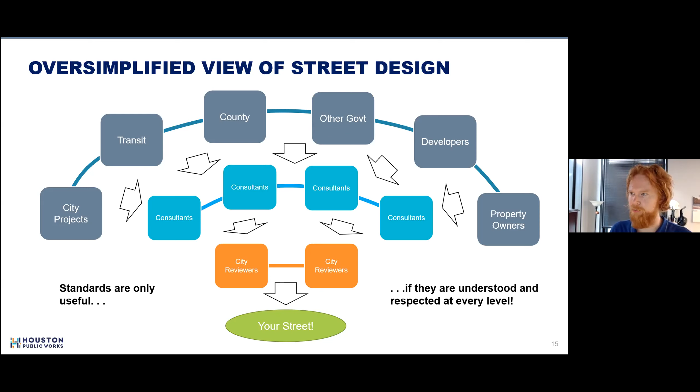So that was my presentation, simplifying lots of different things. We have a lot more in the design manual—a lot of it's really dry. I have a link here you can go look at it. We have all of chapter 17, which deals with bikeways.

We're going to be opening that up in the 2022-2023 review cycle. We'll be looking at chapter 15, which is our traffic section—it deals with traffic impact analyses, signal design, driveway design, and a lot of other things. Then chapter 17 is bikeway, transit, pedestrian. Over this next year we'll be looking for people who want to be involved with this, who can help us make these standards as good as they can be. They're already decent, but there's always room for improvement.

If you take a look through these and have any questions, you can email us at safestreets@houstonTX.gov. We'd be happy to take any kind of comments and review help we can get, and I'd be happy to answer any questions we have now.

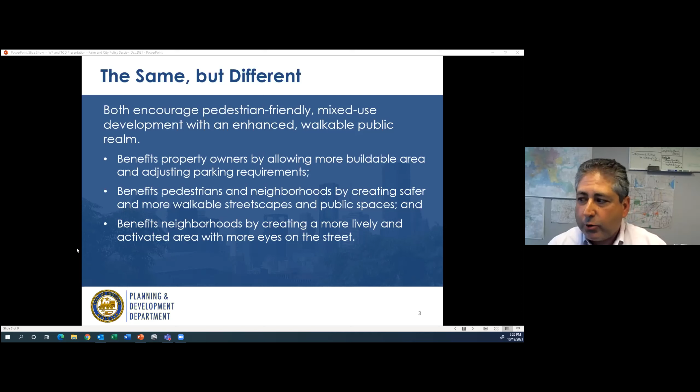Both are intending to enhance, create pedestrian-friendly, mixed-use developments, walkable places, good public realm, all the wonderful planning things we talk about. But we needed to convey more about what it would mean outside of our downtown offices, more about what it would mean to the people in the community. So we needed to really explain the benefits, which was allowing property owners to build more developable area, as well as reducing parking requirements to free that up, benefiting the neighborhood by more pedestrian space and more neighborhood space, safer places, more walkable streetscapes. But also the thing people forget is doing all of these together actually activates the space and makes it a more interesting place, which generally leads to higher property values, which frequently gets our communities going.

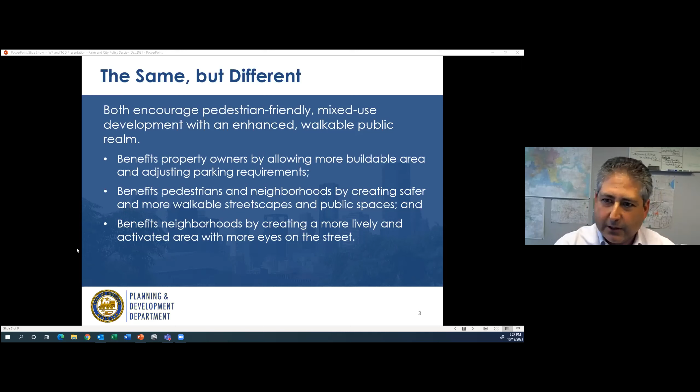But they are different. So the walkable places ordinance, that could be anywhere in the city, but it has to come from a local request.

Separate, but very similar to that, is our transit-oriented development ordinance, which is anywhere where we have high frequency transit service. Right now that's our light rail lines and our bus rapid transit line, although we are looking at our high frequency bus network next. That is saying we have already invested in our multimodal transportation system, and the city should be able to reap the benefits back from that investment.

So what does it mean for these two? Because they're very, very similar. I'm not going to read every line here, but there are different levels of eligibility. The TOD one is tied to where we have transit. The walkable places, as I mentioned, was everywhere. The two sides allow different types of applications for who can move it forward.

The walkable places is much more the community-driven side. The amount of streets that could be designated vary to as little as one street segment if the community is asking for it. And the planning standards that get assigned to these are similar, but vary a bit based on the amount of reduction in parking that we can offer. TOD streets, you can actually eliminate it completely, as well as the pedestrian realm that we ask for in return if you're going to be designated one of these types of streets.

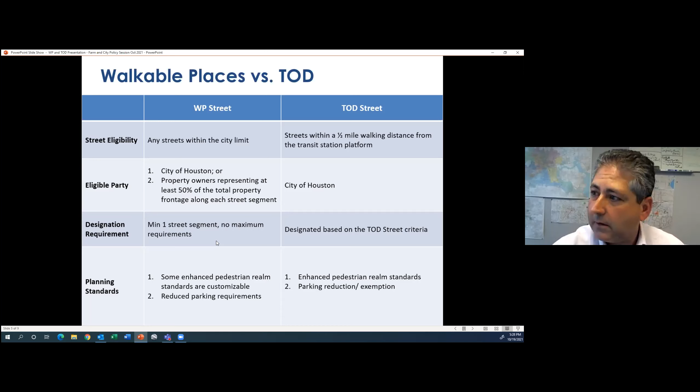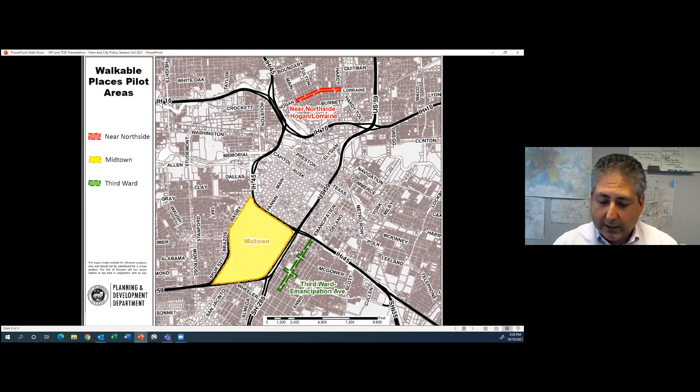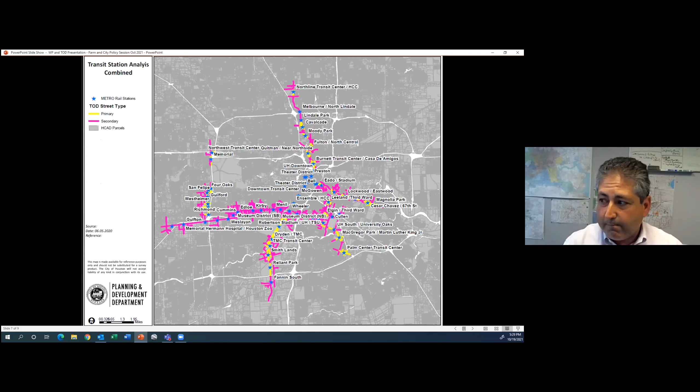So this is actually what it looks like on the map, and why these are so different, why it was important to do them two different ways. This is that walkable places area, the ones that neighbors can actually say, we want it. These three pilot areas have embraced it, and these are the places where walkable places is in effect today, although the next step is to grow this as neighborhoods want it. At the same time, this is all the places for the TOD zone, which is all the places where we have high capacity transit, which is much more linear, but also much more across our city.

We spent a lot of time trying to explain this in very simple to use language. It's not the easiest concept for the public. Some people get it immediately and some people really get lost. So we used very graphic material, very question-answer type: what this would mean for you, what would this mean for my street, why should our neighborhood be doing it? So we have a lot of material available.

And in my last minute, since I've timed this right, I want to tee up something Ian and I are working on right now, which will be the IDM, but really comes out of our Vision Zero work, where the city of Houston is moving away from vehicle level of service and moving towards multimodal level of service. And if you think all this stuff we just talked about is making a big difference, wait till we no longer prioritize cars and speed, but start trading that off in our design manuals for multimodal access.

Awesome, very excited to see where that goes. And thank you so much, David. Sorry about having to pare it down. I think if everybody who would like to stay wants to finish this conversation, we should finish it up.

I think it's kind of amazing to think about, say, 10 or 15 years ago, and how much progress is happening. So I think everybody all around should be kind of proud of where just huge changes are happening. I think it's very exciting.